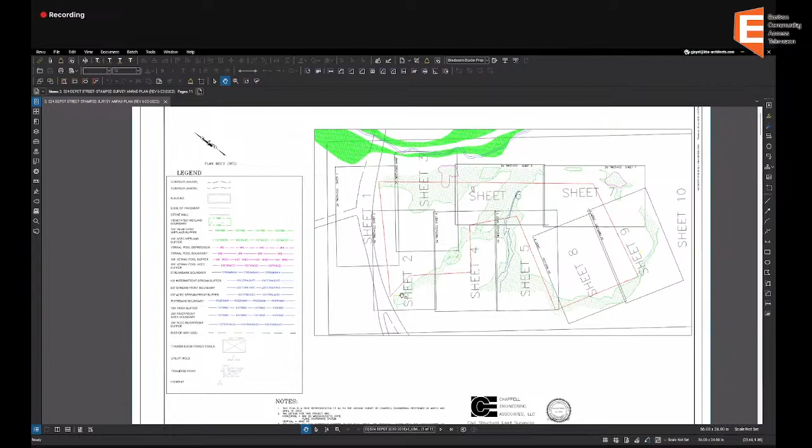Okay, again, they probably told me I need to be very, very brief, I have two meetings going on right now at 6:30, of which I'm the vice chair of both boards, so they told me I could do a very quick meeting and skedaddle. Essentially, as I was saying, the site has every layer of jurisdiction under the State Wetlands Protection Act and your bylaw, with the exception of endangered species it seems, including vegetated wetlands, isolated wetlands, streams, floodplain, riverfront, land under water bodies, and land subject to flooding. As you know, all those apply to your bylaw as well, including the intermittent streams with the riverfront area.

It took 19 different flagging series to delineate all of the wetlands on the property. There are 2 intermittent streams, one defined by the C series and the second by the G series, which is in the southeast portion of the property, if I'm reading the map correctly. There are 4 identified vernal pools along the power line, and one isolated wetland, a very small one, that does not appear to be a vernal pool. The remaining areas throughout are bordering vegetated wetlands.

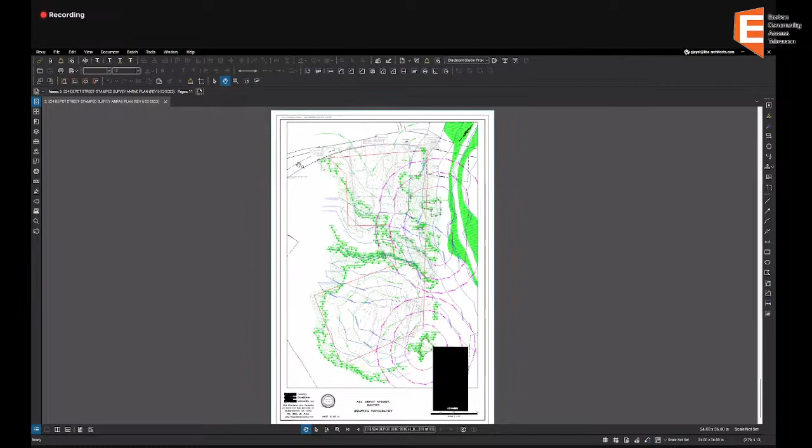Greg, can we potentially move out a little bit so we can give this perspective to where this particular ANRAD is focused in? Let me, this is Depot Street here as it runs west to east. This area here is the power line easement. So if you're familiar with Depot Street, going west to east, there's a small clearing after you pass Whistle Stop and turn the bend a little bit. So there's a small clearing here. That is the small clearing you see from Depot Street, and then you get to the power line easement here and cross under.

Most people are familiar with this when it was the Gill property. The Gill property kind of proper would be just past the property line, just past the power line easement. That helps. It is the northernmost part of the Gill property, which is about 150 acres or so. So is the ANRAD specifically related to this one part of the property? It is.

Jennifer, want to give us any comments? Yeah, just a couple things. So this is the revised plan that we received today, so just need some time to go through it. There is some new flagging that was done recently, so I'll need to check those other flags, but the majority of the site, I have finished the wetland boundary, and I have to say it's a complicated site, and Leah did a really good job, so just a few other spots that I do have to check.

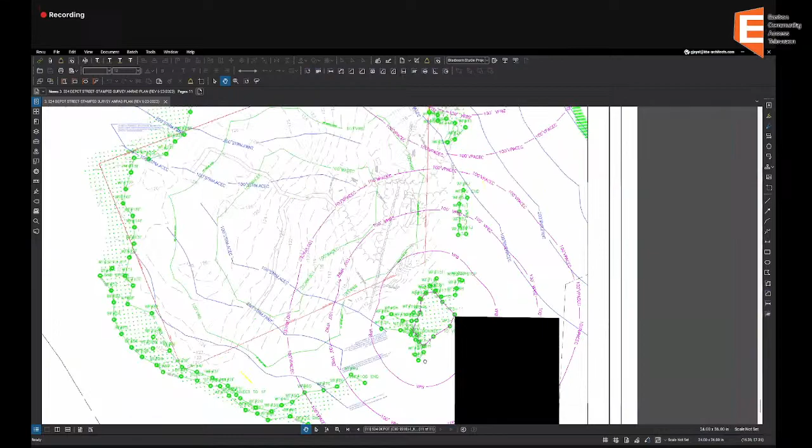And you guys mentioned there are isolated wetlands. Can you point out those, please? I believe he was just referring to the one in the middle. No, I believe it was this one, Jennifer. Okay, I thought she said there were two of them. Is the one further south also isolated? So there's a vernal pool here, and then there's a small portion that looks like it's within the bordering vegetated wetland. I think so, yeah. And the isolated wetland, do you have the square footage of that? Or is that something you can provide later? I'm sure we can provide it, yeah. Okay.

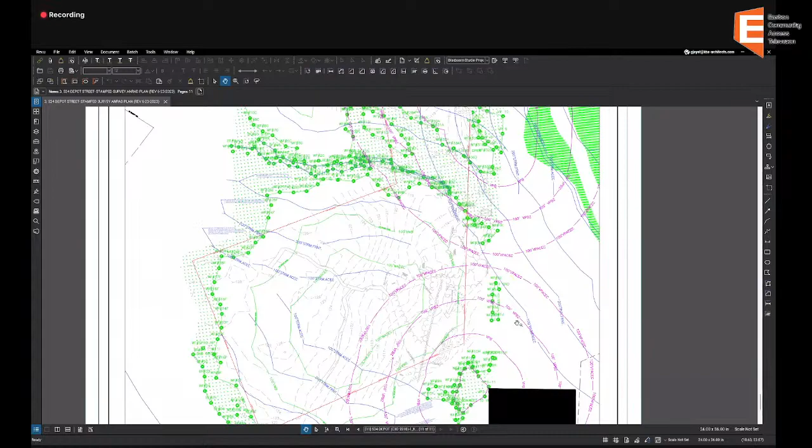Did we resolve the map and parcel number from the permit application? Do you know if we resolved that? Well, do you remember? So it's asked for the parcel number, and I'm asked for the assessor map number. I gave, and it falls on all those assessor maps.

I think that's because it is a single parcel, Jennifer, that spans multiple maps, so we can handle it any way you'd like us to. Okay.

All right, those are actually all the comments I had. Just need that final check of the new flagging that was provided and these revised plans.

Thank you. So Jennifer, you've already spent time out on this site, right? Multiple times, I assume. Yep. I remember some of the flagging originally from 2018, and I know how extensive this parcel is as far as wetlands are concerned, so I know it's a very challenging site to get flagged correctly. So I do appreciate the efforts involved here.

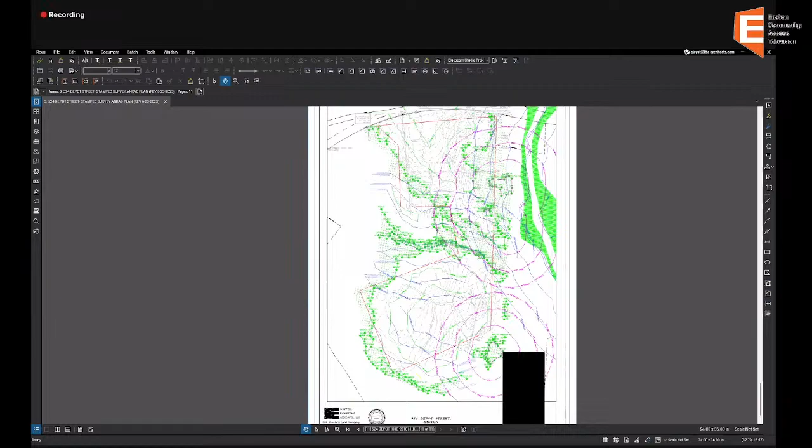Any public comment for 524 Depot Street? You can raise your hand or put a question in the Q&A box. I can recognize you. Just give me 5 more seconds here.

Seeing none, given that we've got some open items here, we'll continue until our next meeting on July 10th. Is that correct, Greg? Yes. I just want to make sure the applicant's in agreement that that's what we're doing. Yes. Okay, motion to continue 524 Depot Street to July 10th.

Spady, second. Caulfield, Spady is second. Roll call vote: Benson, aye. Crossman, aye. Spady, aye. Caulfield's aye. Okay, we'll see you in a couple weeks.

Thank you very much. Thanks. Thank you.

Okay, next up is a continued hearing for 518 Washington Street. They've actually asked for another continuance, so I need a motion to continue 518 Washington to July 10th.

Spady, second. Caulfield, Spady is second. Roll call vote: Benson, aye. Crossman, aye. Spady, aye. Caulfield's aye.

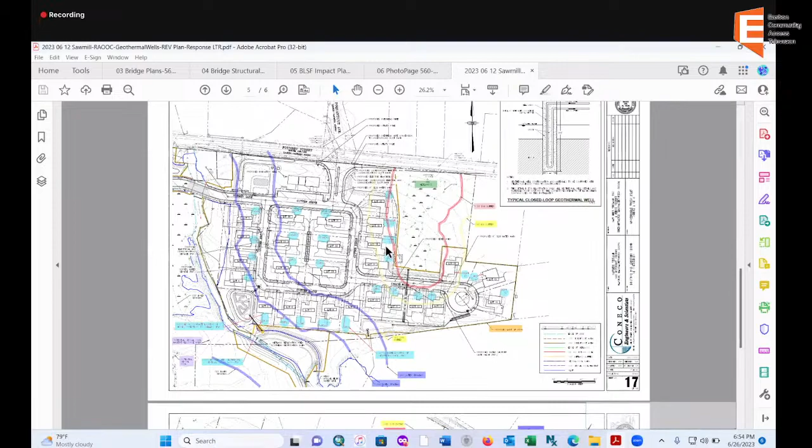So I'll go to the west side of Beaver Brook, and basically it's the same situation. Here's Beaver Brook right here, this is Foundry Street right up here, Old Pond is on the other side of Foundry Street. This is Mulberry Brook right here, flowing from west to east. And this is Vernal Pool E, Vernal Pool A, Wetland A. Each of these blue dots are the locations of the geothermal wells and the connections and detention basins.

The blue line is riverfront area. The red line is the 50-foot no touch zone. The yellow line is the 100-foot buffer. And the purple line here is vernal pool habitat, or the local definition of a vernal pool.

So at this point, Jennifer, I should turn it back over to Rory.

Thank you, Jennifer. Just as a point of information, have we seen the LSP reports or logs or any inspection logs that might be available? I don't believe they've been submitted. Are they meant to be submitted to us on a periodic basis? I don't recall anything in the order.

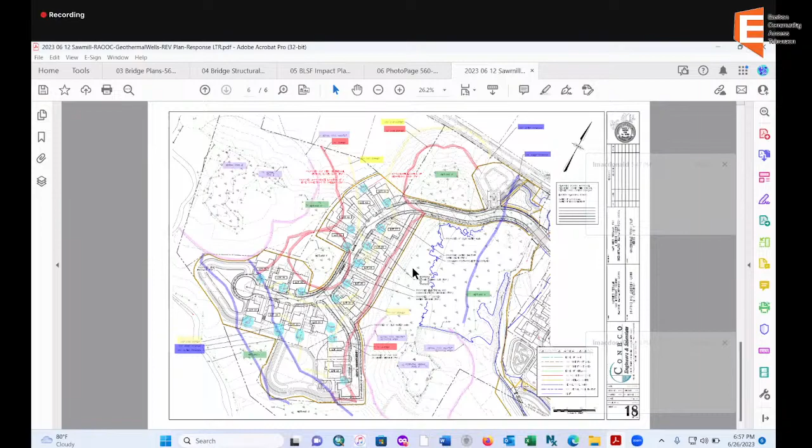Any public comment for 560 Foundry Street, the request for modification related to the geothermal wells? So, seeing none.

Can we just vote, or do we have to close discussion on this part and then talk about the other one? I think you can vote on this. I couldn't think of any conditions that you would need to add. The order and the permit for work, but if you have something... I don't, but should we simply condition that they have to have the dewatering pits located near their drill, or just leave it be? The dewatering pits are on the plan. Okay, and so typically I would write a follow-up letter that says you provided revised plans with the date, stating what they say. I'm good, we don't need to repeat ourselves four times to get the point across. We're good.

I would make a motion to approve the request for modifications related to the geothermal wells for 560 Foundry Street. Second. Caulfield seconds. Roll call vote: Benson, aye. Crossman, aye. Spady, aye. Caulfield, aye.

So now that that's out of the way, let's bifurcate this. As I understand it, just so we can set the stage here, Jennifer, have you had much of a chance to look at the plans that were submitted last Tuesday? No. Right. So Lori, I don't know if you want to give us what you guys are planning, so it'll make it easier for us next time around, and plus give Jennifer some context as well.

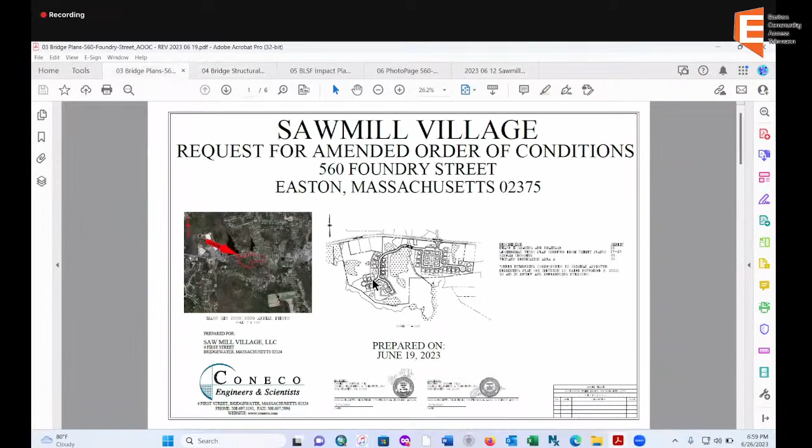Originally we were planning on constructing a conspan bridge, basically a pre-constructed concrete bridge over Beaver Brook, connecting the west side to the east side. Since that time, we changed the bridge design to be more cost effective. At this point, we're proposing a BridgeCor arch bridge with architectural block walls founded on precast concrete spread footings. Because of the change, the footings are about 10 feet deeper and larger than the original footings for the original structure.

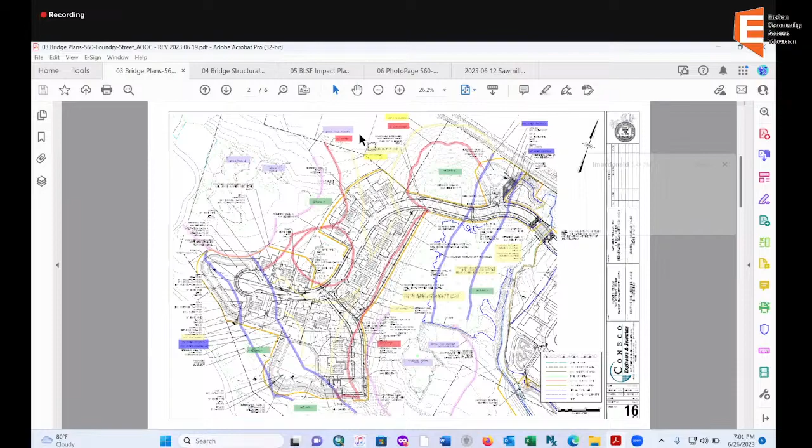So this is the bridge location here, and this dark shaded area right in through here is the footprint of the footings themselves. The footing footprints stay within the limits of work. There's no change in this particular case. However, let me find this on screen, hold on.

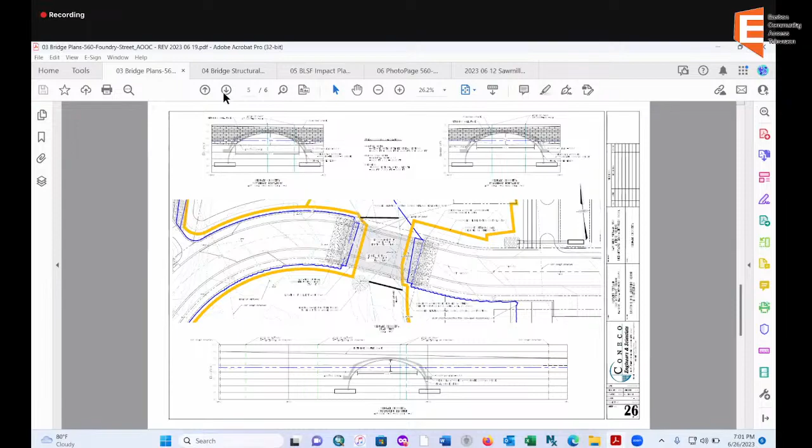However, because of the shape, I don't know if you can see this. Let me zoom in a little bit. This is the southern crossing elevation, and you can see the original shape of the bridge was further out. The footings are basically within the same footprint of the roadway. They're deeper, they're larger. The only impact difference is the impacts to floodplain.

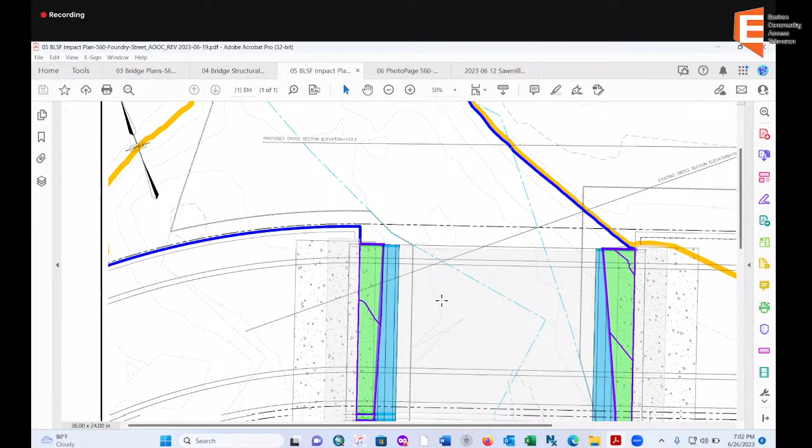The shape of the bridge is going to impact some floodplain within the limits of Beaver Brook. Let me find that. So right here is the sketch of the actual changes to the floodplain elevations.

The proposed arching impacts floodplain elevations 103 to 103.5, shown in this cyan color. There are changes between 102 and 103 in this orange area, and you see elevation changes from 101 to 102 in this magenta area, and then there'll be impact changes from 100 to 101 in this green area.

So let me find that one, just give me a second. As far as actual changes, there's going to be a 42 cubic foot increase at that 100 to 101 elevation, a 188 cubic foot increase at the 101 to 102 elevation, a 394 increase in the 102 to 103 elevation, and then a 213 cubic foot increase in impacts between 103 and 103.5.

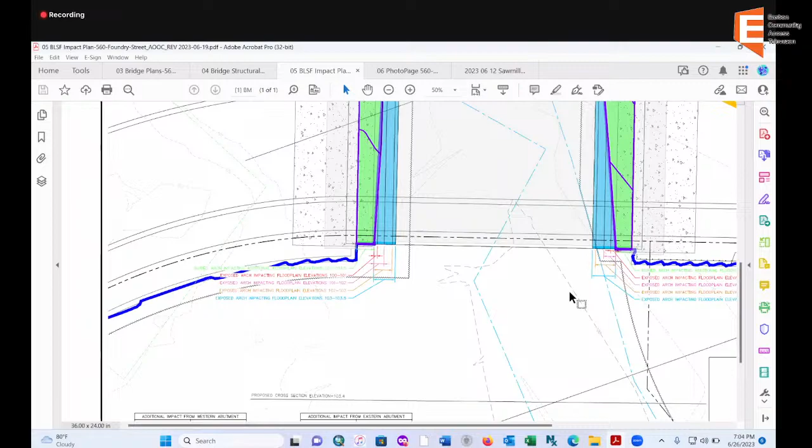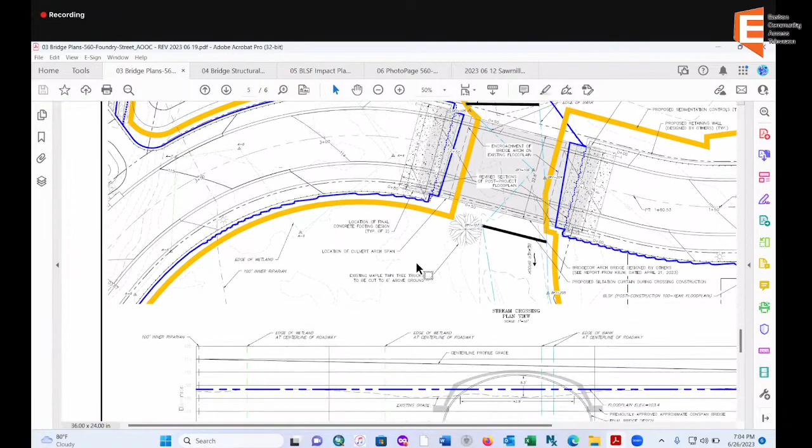Basically, we've decided to mitigate those impacts right at wetland replacement area A. Let me find that, that's the wrong thing. So all the additional impacts to floodplain will be mitigated in wetland replacement area A by expanding the mitigation area at the overflow from the stormwater basin. This is the riprap slope that accepts discharge water from the stormwater system. We've increased the size of wetland mitigation area A by expanding it out to the west into this riprap slope to get our additional storage needed.

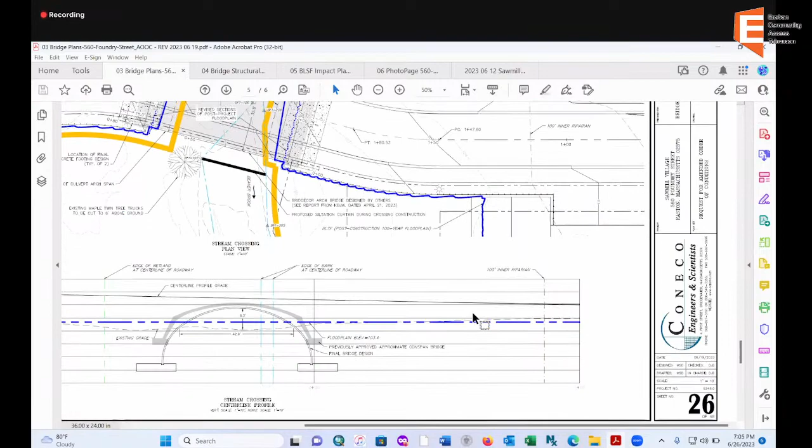We've proposed to add 14 Clethra alnifolia sweet pepper bush in this area to keep it vegetated. So although there is a slight increase in flood impacts, we are mitigating for those impacts. The footings, again, just like the original footings, when they're constructed, the contractor will excavate down and dewater within the limits of the footings. They'll dewater to an upland area away from the resource area. There'll be no actual impacts to bank at all, all the excavation will remain upslope away from the stream bank.

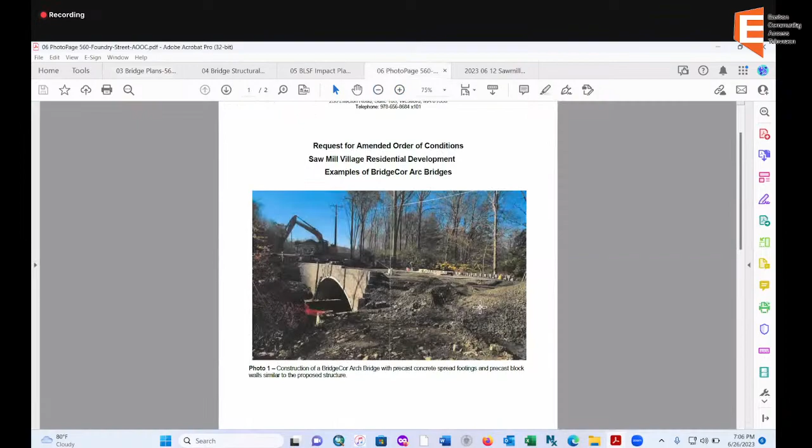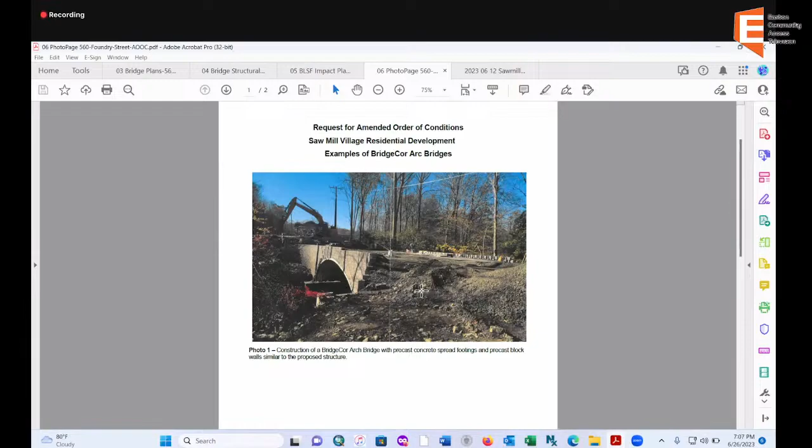I just wanted to show you some pictures of what this bridge structure is going to look like. This is an example. Here are the footings right in through here, and this is the BridgeCor. It's a metal structure, and what they do is construct the footings, install the arch, and then backfill and construct the walls at the same time until they reach the subgrade elevation of the road. Then they'll install their utilities and finish constructing the road. This is a good photo of what the construction will look like close to completion, and this is an example of what the bridge will look like if you're looking at it from the stream.

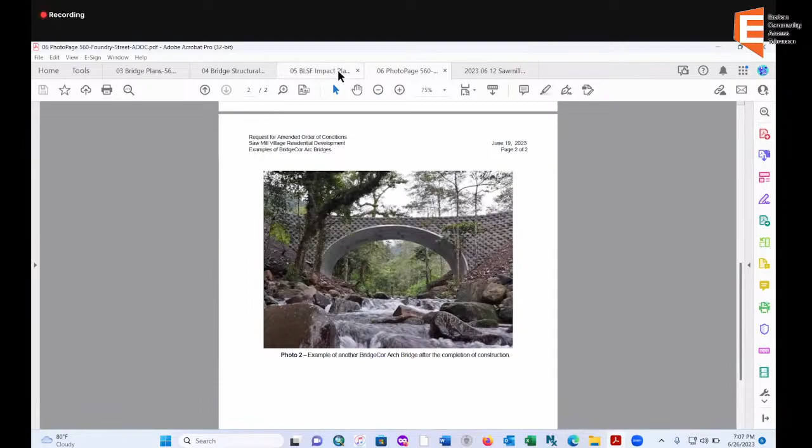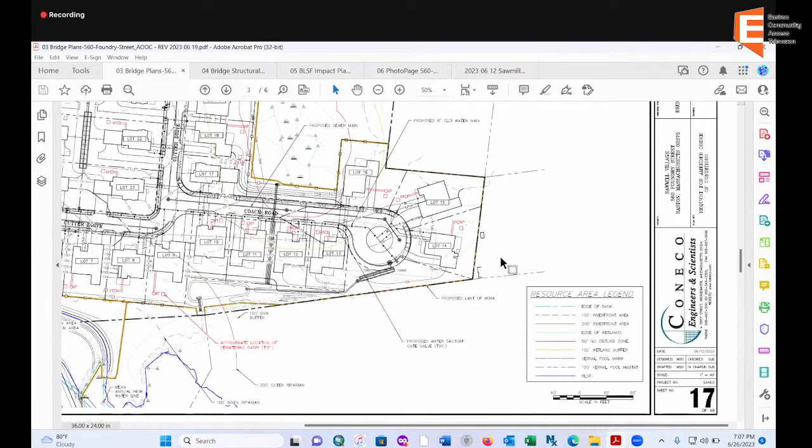So I have the designer who was unable to attend tonight. I didn't think we'd really get into too much detail at this point because we're so late with our submission. But at the next hearing, I'll plan on having our designer present to address any more specific questions the commission may have on the design. So I don't know if I was clear, Jennifer, Rory, but I hope I did provide some clarity.

Yeah, I mean, I think you did give us a good idea of what the changes are being proposed. I mean, I think there's some details here that we'll probably want to get into at some point. And Jennifer, I don't know if you had any specific questions before I dive in with a couple of my own.

I do, yeah, two kind of quick ones. Lori, did you provide a compliance statement with the request? One, just how does it meet BLSF performance standards under the bylaw and under the Wetlands Protection Act? I don't think I did, no, but I can put one together. Okay, so I'm curious about how does BLSF get into the basin, into the wetland replication area from the floodplain? Where's the unrestricted hydrologic connection? I show that on one of your plans. Yeah, sorry.

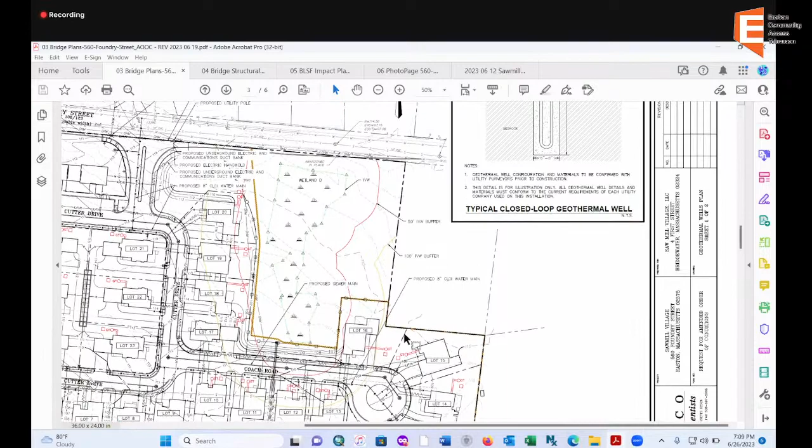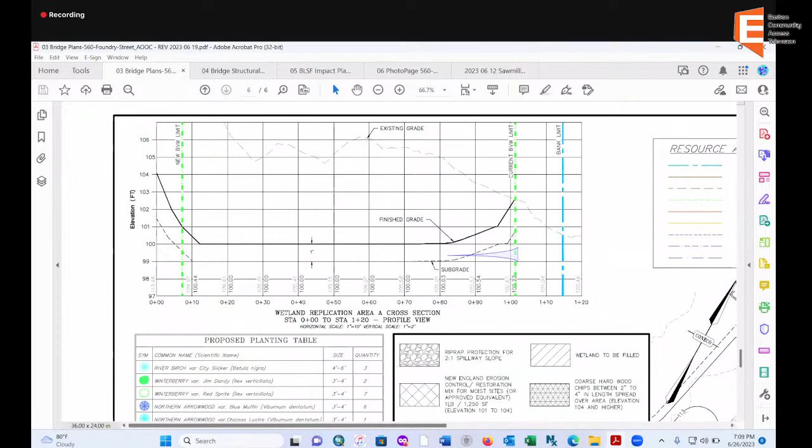So the connection is here. I don't know if you can see this with me. So the connection is this green line. This connects out to Beaver Brook. There's the bank flags of Beaver Brook. So the connection is at... okay, 100 to 101.

And that small channel is adequate to get that much water into the area? I know you've looked at it before, but yeah, my understanding is yes. I'd have to defer to the engineer, but my understanding is it's sufficient enough to accept water up to elevation 103, 104. So, but I can confirm with the engineer.

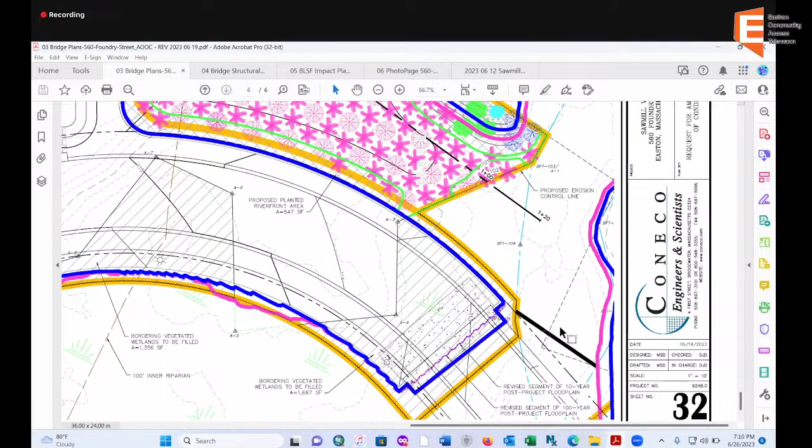So the blue is the proposed 100-year floodplain. Correct, yeah. And does it show on there where the existing floodplain is? Is it the 103 in that area too, or is it shorter? I don't want to, let's see, I don't think she's showing it here. Okay. I think it's this dashed blue line. This was the original limits of the flood storage, and it's been increased to this dark blue line in this area right here, but I'd have to confirm that with the engineer.

Okay, it may be in your packet. I just didn't get to look at it. But thank you, that's the only question I have at the moment.

So I think that from my perspective, just a couple of questions. One is, do we have anything that compares the durability of the previous design versus the durability of the new design? Like how long should we expect the new bridge design to last before it needs to be replaced or repaired versus what the previous proposed construction was?

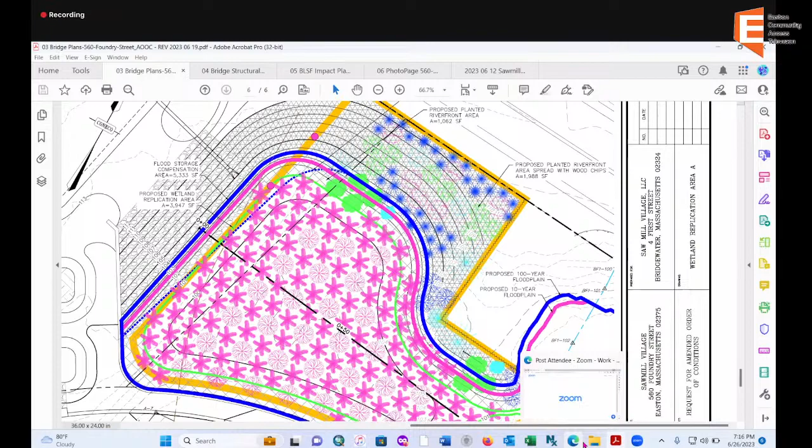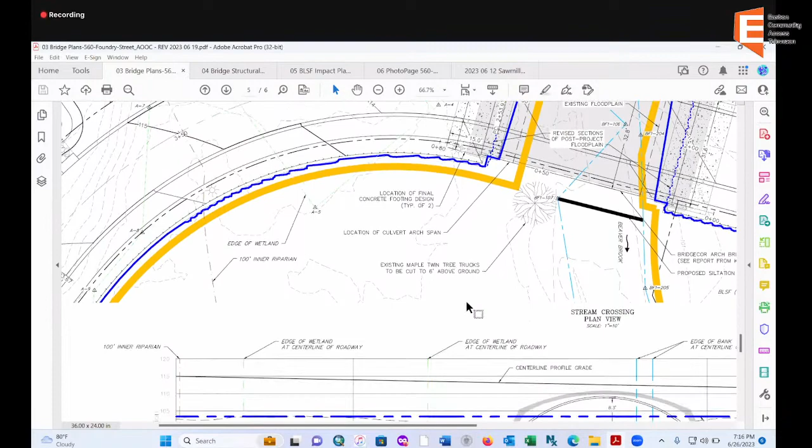Okay, but it looked like from the detail you showed us, it might actually be a little wider, allowing more. Is that openness ratio a little bigger? Maybe, I have to go back and look. Where's that, the one that showed the two crossings together? You go right by it. Yep, oh okay, yep, there we go. So this is the proposed, it's a little bit smaller, but we still meet the standards.

We're trying to help Lori. Yeah.

Anything else, Nate or Mike? No questions, none for me. I'm good.

Anything else tonight, Lori? We'll leave it for you and Jennifer to sort of meet back up once she can pull the file again. Any public comment on 560 Foundry Street?

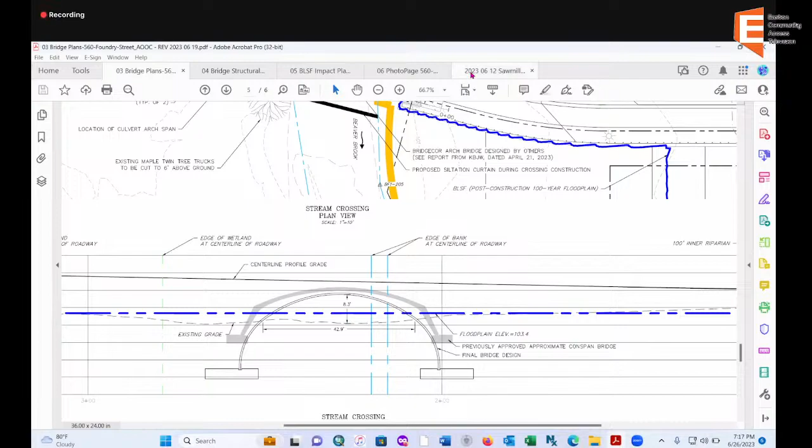Seeing none, so we'll continue this particular request for modifications related to the change in bridge design until July 10th. Enough, Jennifer, for now? Yeah, okay, so until July 10th, 2023.

Need a second? Spady second, Caulfield, Spady a second. Roll call vote. Benson, aye. Crossman, aye. Spady aye. Caulfield's aye. Okay, Lori, thank you very much.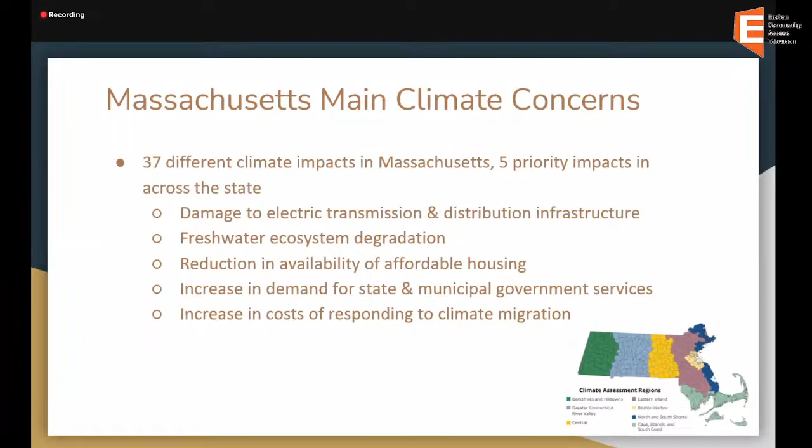For climate change in the Eastern Inland region, a vulnerability preparedness and community resilience building workshop held in 2018 found that climate change is causing extreme temperatures, as you can see in the image - the number of days over 90 degrees Fahrenheit is increasing each year. It's expected that by 2050 there will be 25 days above 90 each year, and by 2090 about 55 days over 90 each year, when historically from 1950 to 2013 there were only 4.

For extreme storms, that's due to flooding and wind, like explained previously. And then there's also this flood drought cycle that we are seeing in this region. The flood is mainly due to more intense storms, but it's also usually followed by a period of no precipitation, or a dry cycle.

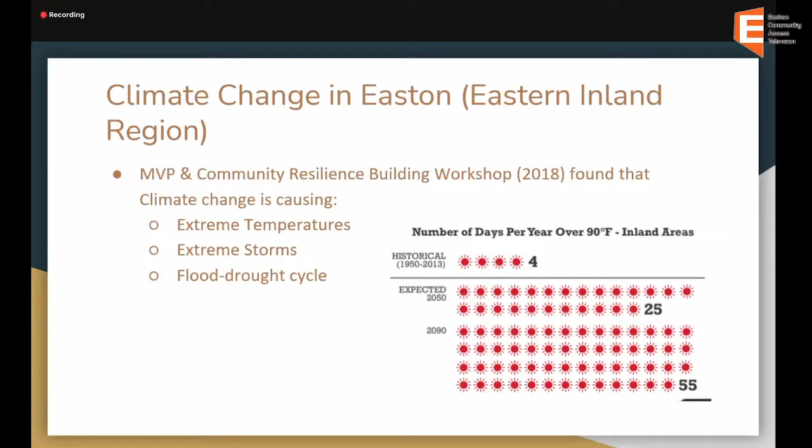So main climate concerns in Easton, or the main Eastern inland region, is reduced food security and safety. This is due to increasing temperatures and power outages that can cause spoiled food, and food is also becoming more limited through disruptions to supply. So basically, food costs are expected to increase over the next century.

The reduced food safety and increased vector-borne disease information I got from the Climate Change Assessment Report, Volume 3. So mitigation to climate change through the Wetlands Protection Act for extreme temperatures mainly involves regulations that support cooling and shading, which can be in buffer zones to help mitigate those temperatures.

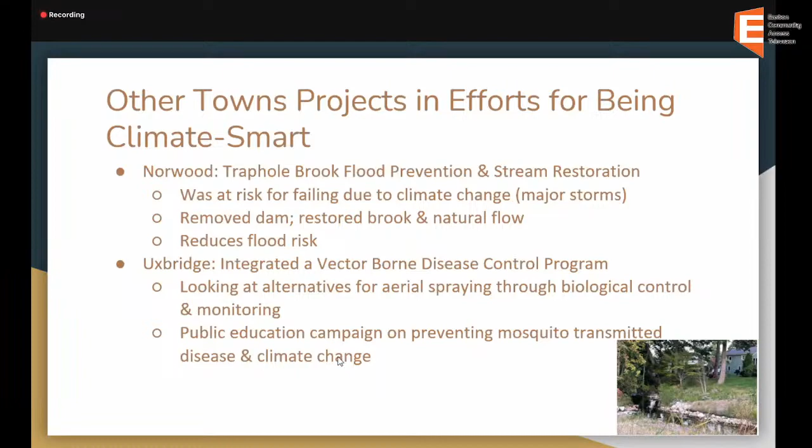So other towns' regulations in being climate smart: the town of Millis has regulations on storage of fill so that it's not in the buffer zone and is surrounded by hay bales, which prevents erosion off of the fill that might be stored on the property during a construction period.

They also require 1.5 times the wetland being altered to be replaced or restored. So it basically tries to combat any damage they're doing to the wetland.

Now, the town of Arlington has climate resilience as part of their regulations, with a whole section on it, but they follow the FEMA 500-year flood evaluation. They also have a 2-to-1 compensatory flood storage replacement and a 2-to-1 tree replacement/planting. So for every tree that's cut down, two need to be planted, for example.

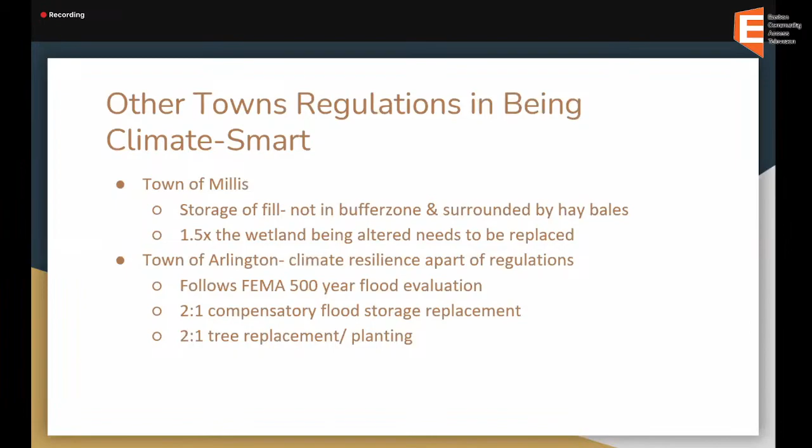Suggested regulations to help Easton's climate resilience: for wetlands or surrounding buffer zones being altered, I suggest we should replace/restore more land that was altered. This is because freshwater degradation is an environmental concern.

Invasives can take away from a resource area's resilience by taking up nutrients and taking away shading and cooling. I say invasives must be either rooted out or treated during the duration of a permit.

And then for stormwater, use more recent rainfall data to calculate stormwater storage and possibly calculate FEMA 100 and 500-year flood evaluations. This is because storm intensity and floods are expected to increase, and we just want to be climate adaptive and prepared for that.

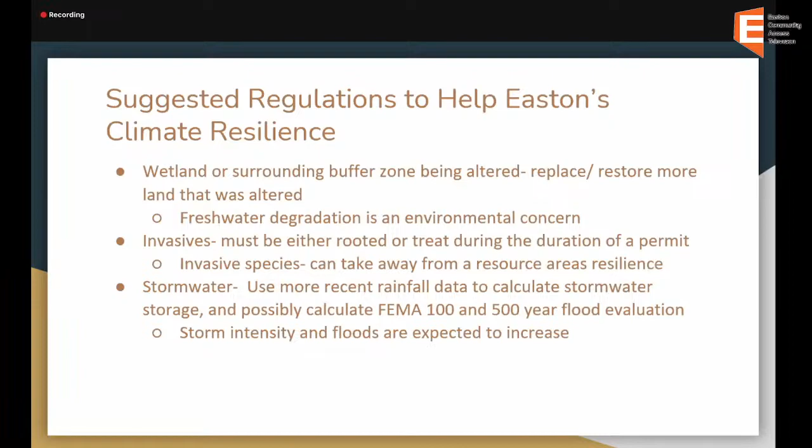So what we have in our bylaw regulations that is good: the wetland values that are protected under our bylaw and the Wetlands Protection Act work in favor of mitigating and adapting to climate change. For example, our buffer zones of 100 feet for resource areas and 200 feet for streams and rivers mitigate climate change through filtering water and providing cooling and shade for our resource areas, which is essential to mitigating degradation to freshwater ecosystems.

Regulating land subject to flooding is about being adaptive to more intense floods. I think we're really good with making sure our land subject to flooding is not being altered.

And area of critical environmental concern, our ACEC, is a restricted area that protects carbon sinks. They store and take up more carbon than is being released, like our wetlands, rivers and streams. That helps mitigate climate change as it happens due to increasing greenhouse gases in the atmosphere.

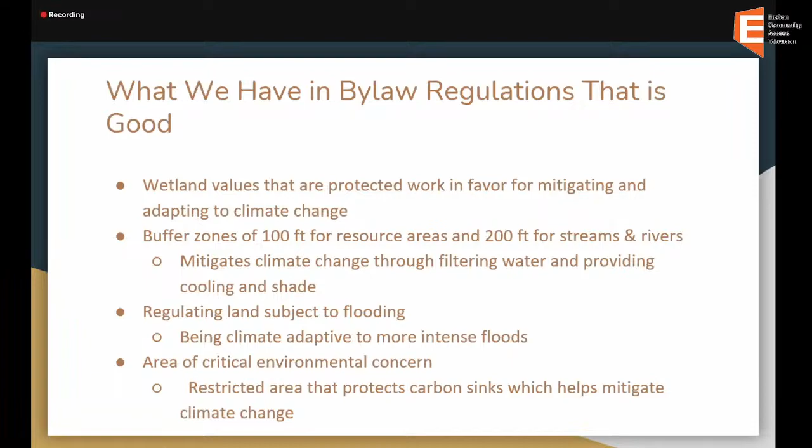So that is all I have. Does anybody have any questions? Good job. Thank you. Very good.

I truly appreciate this, Lauren, because we actually started this conversation probably about three years ago when we started talking about trying to adapt our regulations without even changing the bylaws. How could we adapt them to take into account climate change as a wetland resource? Climate resiliency as a wetland resource, which I think you've outlined very clearly here, what the benefits of doing so are.

It's very interesting to me that a town such as Arlington is actually a leader in this area. They were one of the first towns in the state, if not the first, to adapt their regulations to account for climate resiliency. I would say if someone asked me what was the first town to implement regulations adapted to climate change, Arlington probably would not be in your top 10. But I really give Arlington a lot of credit, they've got some great leadership there on the conservation side.

I think one of the things you've done here is point us to other ways of adapting our own approach to wetland resource management to protect what we do have in this town. Obviously we value a lot of what we do. We've got 4,000 acres of protected conservation land, and one of the probably strongest bylaws and regulations in the state as far as protecting things. And you've shown us why that's important, right?